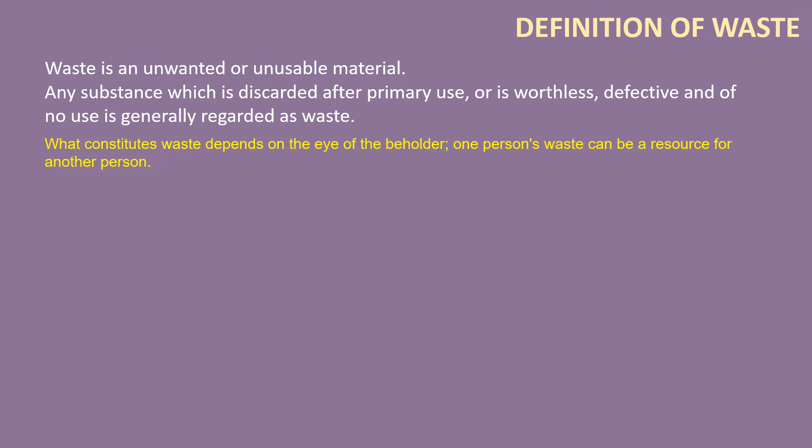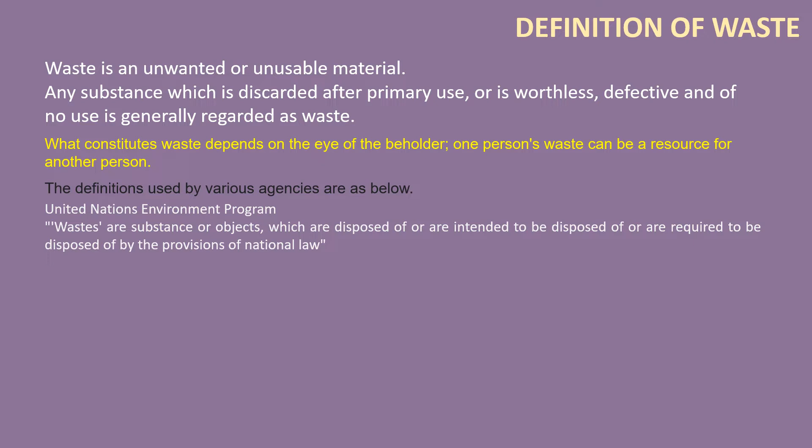There are different definitions used by different agencies. As per United Nations Environment Programme, wastes are substances or objects which are disposed of or are intended to be disposed of or are required to be disposed of by the provisions of the national law. As per United Nations Statistics Division, wastes are materials that are not prime products, for which the generator has no further use in terms of his or her own purposes of production, transformation, or consumption, and which he or she wants to dispose.

Wastes may be generated during the extraction of raw materials, the processing of raw materials into intermediate and final products, the consumption of final products, and other human activities. Residuals recycled or reused at the place of generation are excluded.

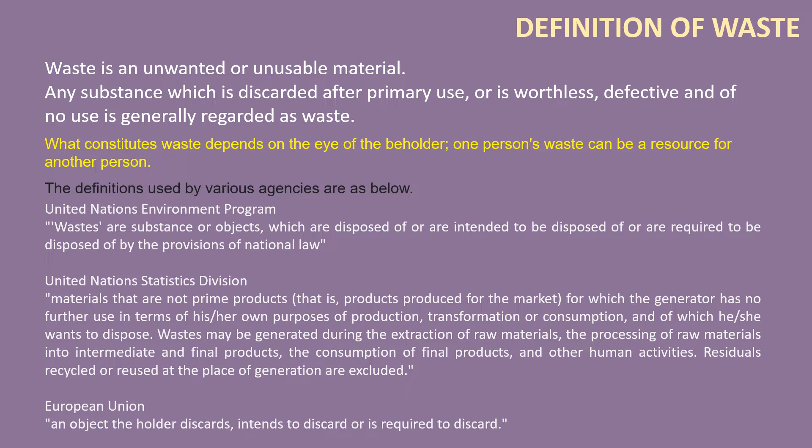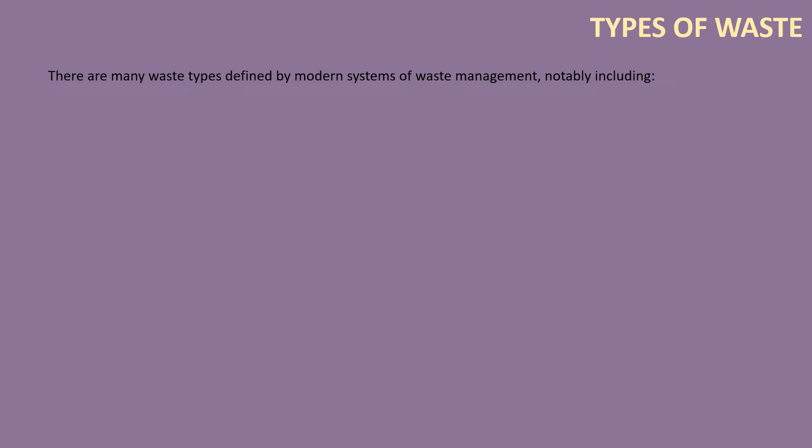As per European Union, waste is an object the holder discards, intends to discard, or is required to discard. The waste can be in solid, liquid, or gaseous form. Solid waste is categorized into 4 types: municipal waste, hazardous waste, biomedical waste, and special hazardous waste.

Municipal solid waste includes household waste, commercial waste, and demolition waste. Although the waste may originate from a number of sources that has nothing to do with the municipality, the traditional role of municipalities in collecting and managing these kinds of wastes have produced this particular term, municipal waste.

Household waste, commonly known as trash or garbage, is a waste type consisting of everyday items that are discarded by the public. It also contains food waste. The segregation of organic and inorganic waste, the dry and the wet waste at the source itself has been enforced in many countries around the world. It has also been initiated in India.

Commercial waste consists of waste from premises used mainly for the purpose of trade or business, or for the purpose of sport, recreation, education, or entertainment, but excluding household, agricultural, or industrial waste.

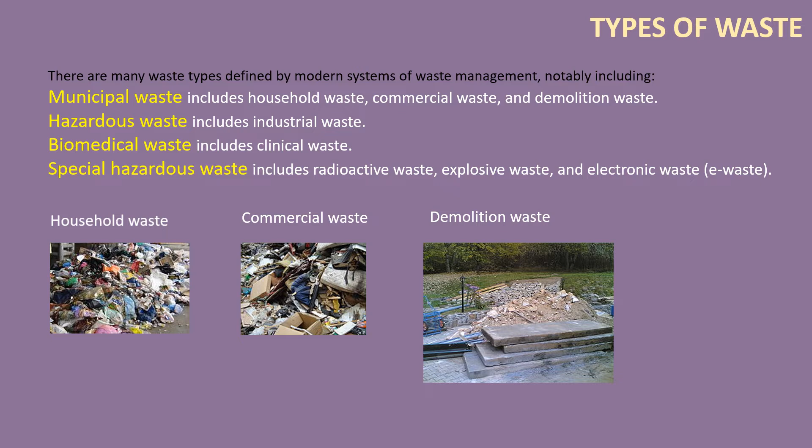Demolition waste is debris from destruction of buildings, roads, bridges, or other structures. Debris varies in composition, but the major components are concrete, wood products, brick, clay tiles, and steel. There is a potential to recycle many elements from the demolition waste.

Hazardous waste includes industrial waste. It is the waste produced by industrial activity which includes any material that is rendered useless during a manufacturing process or during mining operations. Types of industrial waste include dirt and gravel, masonry and concrete, scrap metal, oil, solvents, chemicals, scrap, even vegetable matter from restaurants.

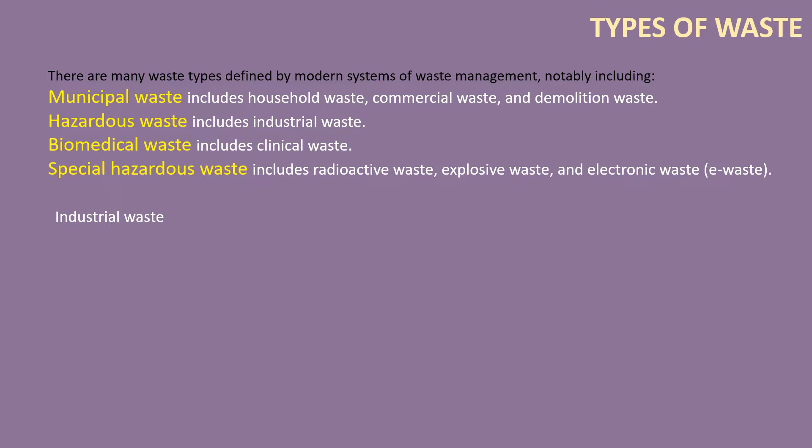Industrial waste may be solid, semi-solid, or liquid in form. It may be hazardous or non-hazardous waste. Industrial waste may pollute the nearby soil or adjacent water bodies and can contaminate groundwater, lakes, streams, rivers, or coastal waters. Industrial waste is often mixed into municipal waste, making accurate assessments difficult. Most countries have enacted legislation to deal with the problem of industrial waste, but enforcement is always an issue.

Biomedical waste or hospital waste is any kind of waste containing infectious or potentially infectious materials. Biomedical waste may be solid or liquid. Examples of infectious waste include discarded blood, sharps, unwanted microbiological cultures and stocks,

identifiable body parts, other human or animal tissues, used bandages and dressings, discarded gloves, other medical supplies that may have been in contact with blood and body fluids, and laboratory wastes that exhibit similar characteristics. Waste sharps include potentially contaminated used needles, scalpels, lancets, and other devices capable of penetrating skin.

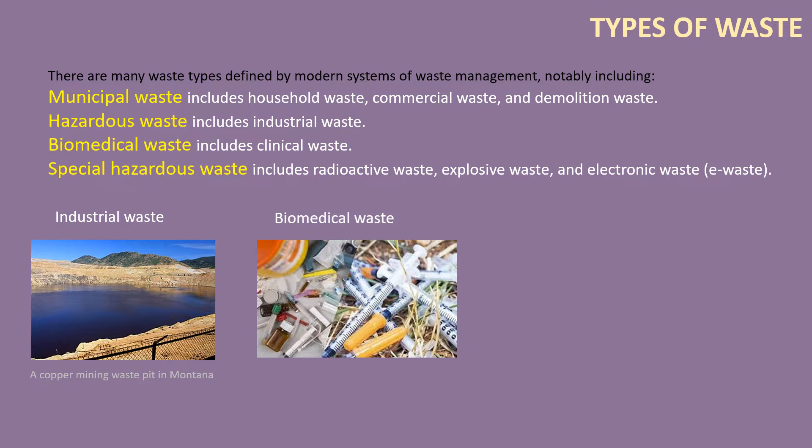Electronic waste or e-waste describes discarded electrical or electronic devices. These include refrigerators, air conditioners, small household appliances, IT equipment including monitors, consumer electronics including televisions, lamps and luminaires, toys, tools, medical devices, monitoring and control instruments, automatic dispensers, etc.

Electronic scrap components such as CPUs contain potentially harmful materials such as lead, cadmium, beryllium, or brominated flame retardants. Recycling and disposal of e-waste may involve significant risk to health of workers and their communities.

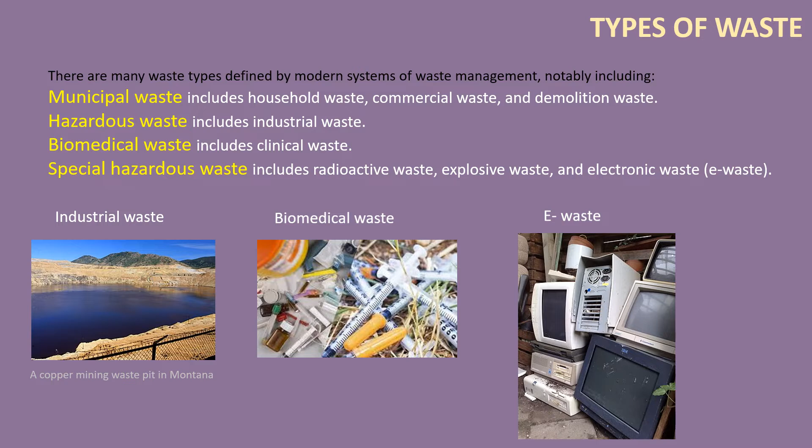Waste management includes the processes and actions required to manage waste from its inception to its final disposal. This includes the collection, transport, treatment, and disposal of waste, together with monitoring and regulation of the waste management process and waste-related laws, technologies, and economic mechanisms. The aim of waste management is to reduce the dangerous effects of such waste on the environment and human health. A big part of waste management deals with municipal solid waste, which is created by industrial, commercial, and household activity.

Talking about the Indian scenario, the cities in India have been expanding at an unmatched pace, and this is expected to continue over the coming decades. Rapid urbanization and the consequent enhancement in the lifestyle of people are causing a huge impact on the environment, especially on the microclimate of all the growing and evolving cities due to problems such as increased burden on urban landfills.

Solid waste management has become a cause for concern for many urban local bodies in India. Urbanization, industrialization, and economic growth have resulted in increased municipal solid waste generation per person.

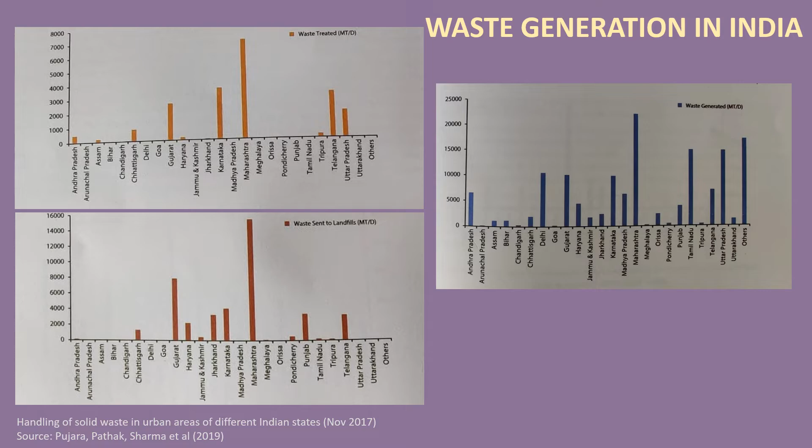Absence of proper segregation at source, generation of large quantities of solid waste, and challenges faced in the collection of waste on a regular basis make effective solid waste management a major challenge in cities with high population densities.

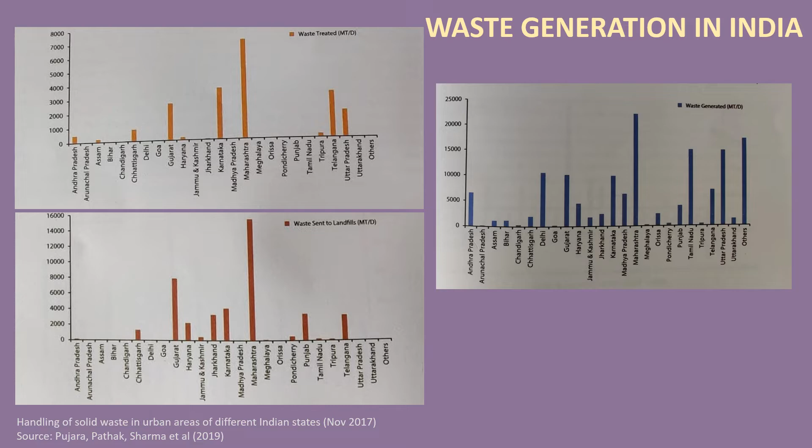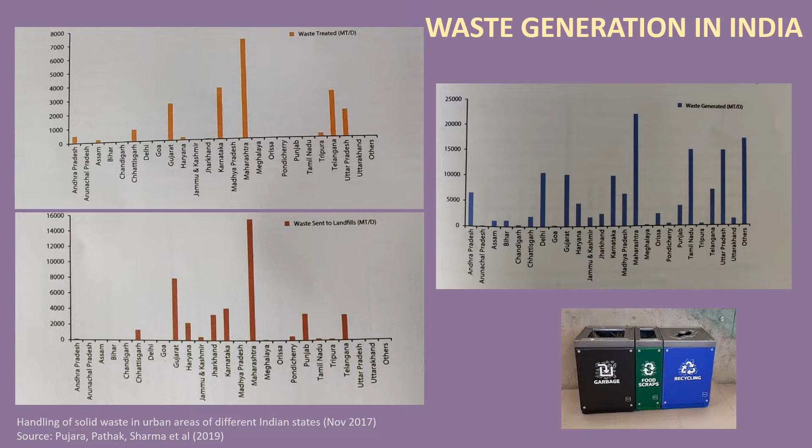For better waste management, solid waste management rules have been put in place by the central government, and several urban local bodies are also trying to reinforce waste segregation through adoption of color coding. For instance, most urban local bodies designate green bins for biodegradable waste, blue bins for recyclable waste, and black bins for other types of waste such as e-waste or hazardous waste.

Despite significant development in social, economic, and environmental areas, solid waste management systems in India have remained relatively unchanged. One of the reasons for inadequate infrastructure is the shortage of funds that have been granted to municipalities for solid waste management. Solid waste collection accounts for most of the expenditure in the whole process of managing waste. This is due to maintenance of trucks, fuel costs, salaries, etc.

In the absence of funds, there is sometimes a shortage in the staff and collection trucks required for collecting, segregating, and disposing of solid waste.

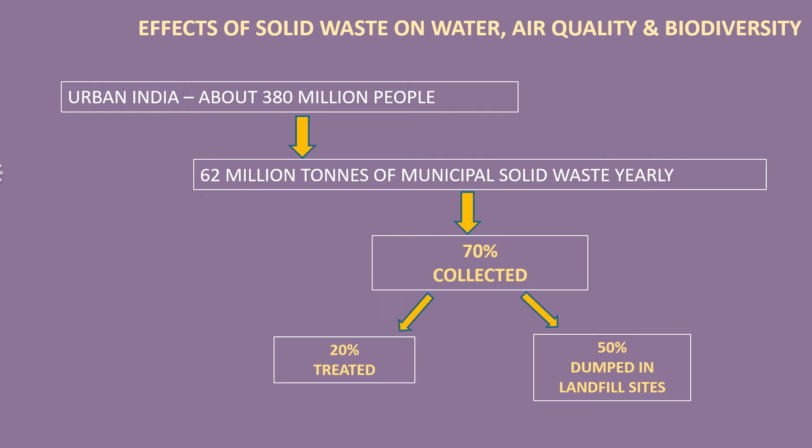Solid waste that is collected in landfills instantly becomes a part of the existing hydrological system. Rainfall percolates through the stored waste dumps and forms leachate, which is acidic in nature. This leachate moves down from these sites and flows into nearby water bodies, contaminating them.

Leachate produced from landfill sites also percolates into the soil. The effect caused on the soil can only be observed with time and might not be evident immediately after waste is dumped in the landfill. Leachate from these dump sites is generally toxic in nature and results in the degradation of the soil, thereby reducing its fertility over time and also damaging vegetation in the vicinity of the dumping site.

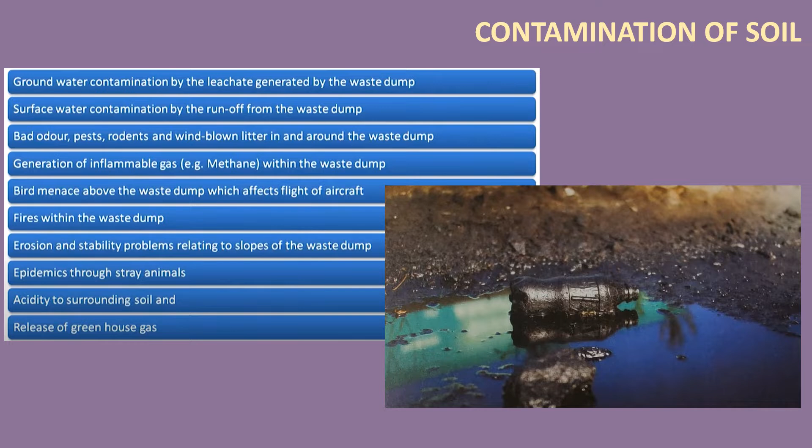The air in the vicinity of a landfill site is highly toxic and malodorous. In the landfill, a significant amount of gases consisting of methane, carbon dioxide, nitrogen, oxygen, hydrogen, and other greenhouse gases are produced that cause an increase in the temperature and changes in the climatic conditions.

Landfills are the principal source of anthropogenic methane emissions. These emissions not only cause air pollution but also contribute largely towards climate change and global warming. As landfilling increases, waste may need to be incinerated in order to make space available. This releases toxins contained within the waste into the atmosphere, contributing to air pollution as depicted in the picture.

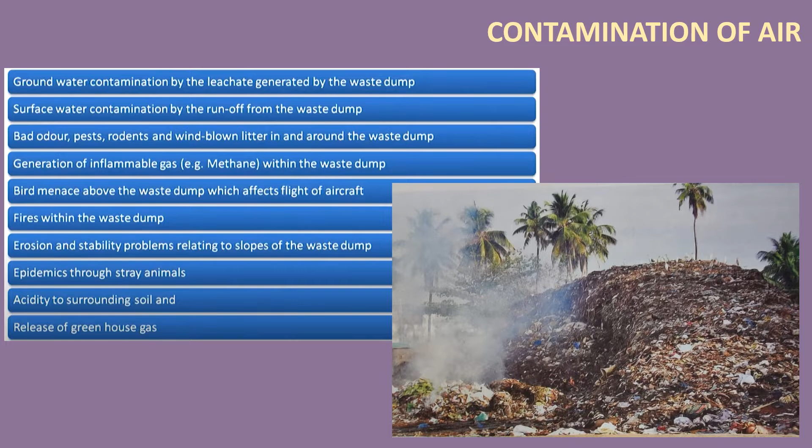The landfilling site may alter the composition of vegetation in the surrounding ecosystem. Dumping waste in landfilling site affects the flora and fauna on both land and water. It can disturb the species composition of native vegetation and allow invasion of invasive and non-native species.

Another particular waste that hugely affects biodiversity is plastic. Plastic was initially developed as a resource that had all the necessary properties required in any packaging material, that is cheap manufacturing, durability, and weather resistance. However, due to a combination of these properties, it eventually took over all other packaging products. Due to its inert nature, it can survive in the atmosphere for centuries without degrading.

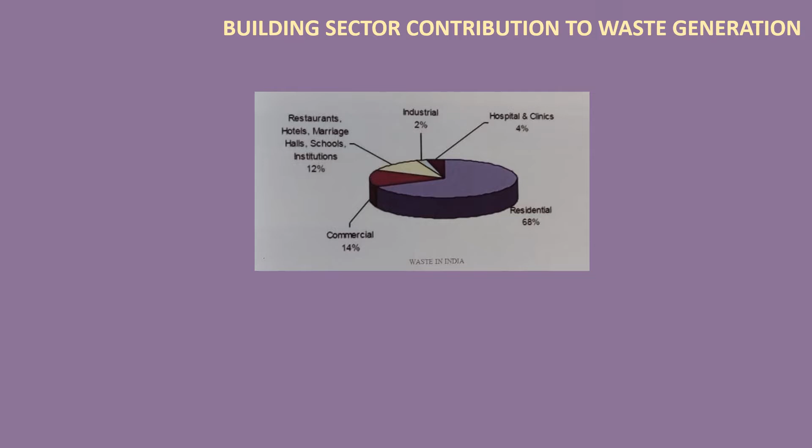The three R's, reduce, reuse, and recycle, are the three essential components of environmentally responsible consumer behavior. Various strategies that could be adopted to minimize waste generation from different building typologies are suggested here.

For healthcare facilities, the waste generation can be reduced by employing strategies such as: 1. Installation of dispensing units in housekeeping rooms to ensure that staff restricts themselves to using only the required quantity of chemicals. 2. Engaging in use of physical rather than chemical cleaning methods such as steam disinfection instead of chemical disinfection.

3. Provision of biodegradable foodware or reusable foodware like steel in canteens at healthcare facilities. 4. Use of air dryers instead of paper towels in restrooms.

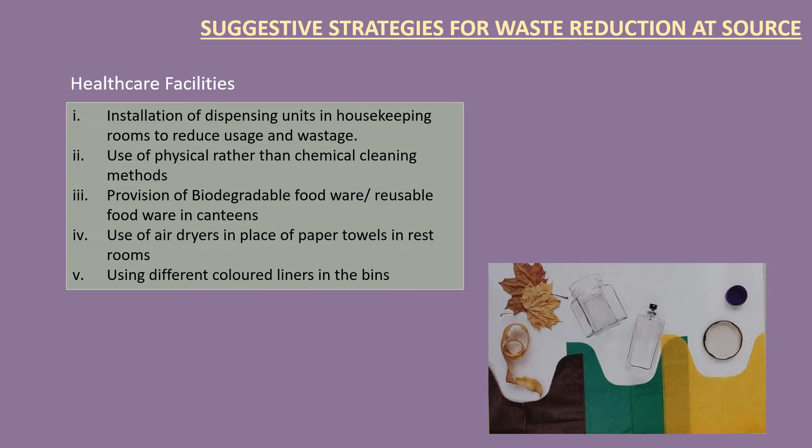5. Using different colored liners allows the cleaning crew to easily keep track of what is recyclable and which container it should be placed in. 6. Installing reverse vending machines which do not dispense something on inserting money but take in plastic bottles and dole out some sort of goodies or incentives for the user.

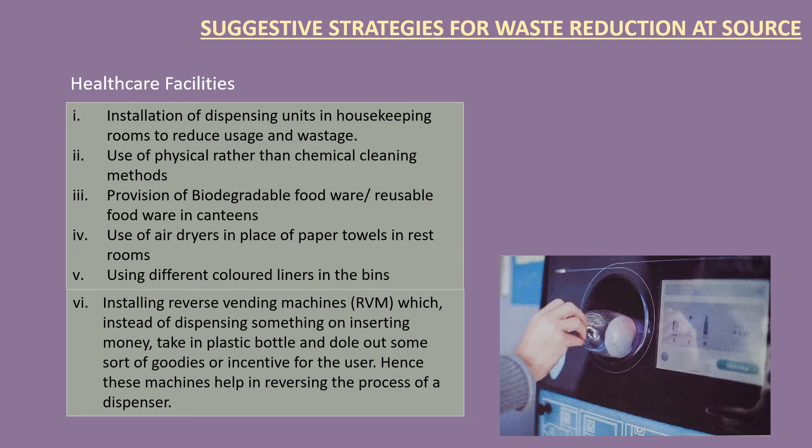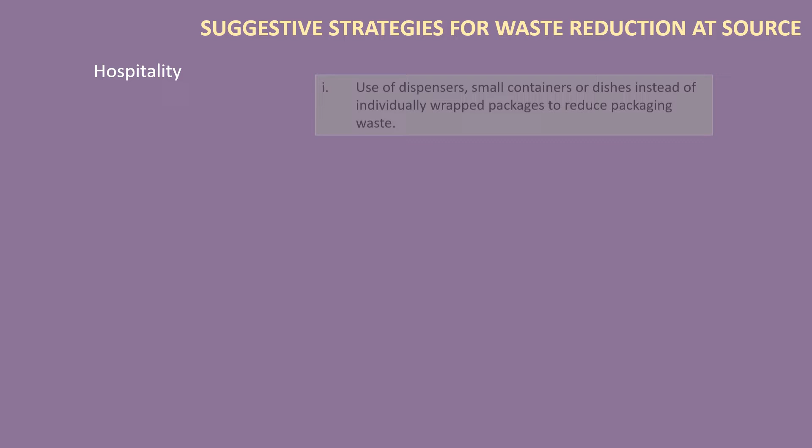For buildings under the hospitality category, the suggestive strategies are use of dispensers, small containers or dishes for sauces, sugar, butter and other condiments instead of individually wrapped packages to reduce packaging waste.

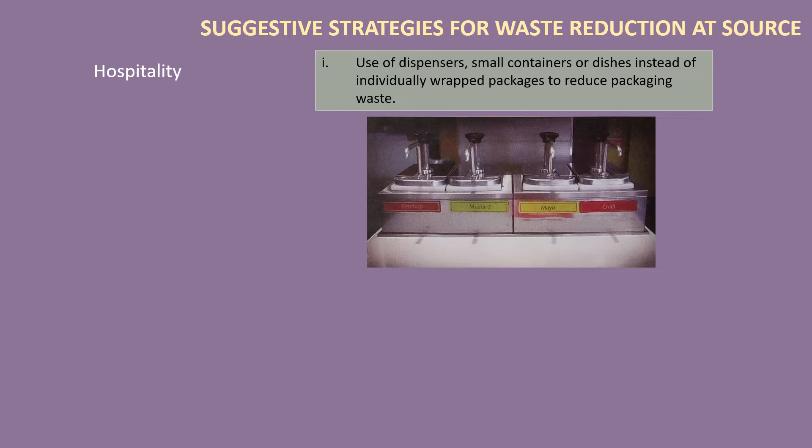Use of cloth mats and permanent coasters instead of paper mats and paper napkins that need to be discarded after every meal. Provision of water bottles that can be refilled instead of plastic disposable water bottles.

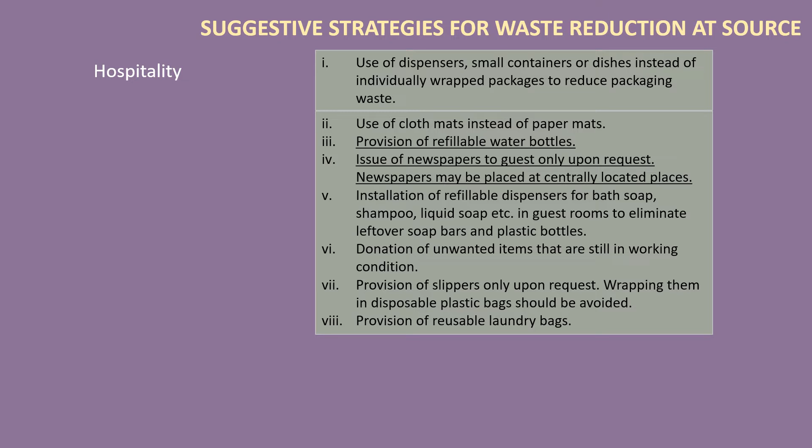Issue of newspapers to guests only upon request to reduce the volume of discarded newspapers. Newspapers may be offered at centrally located spaces such as lobbies, restaurants and news stands.

Installation of refillable dispensers for bath soap, shampoo, hair conditioner, etc. to eliminate leftover soap bars and plastic bottles of used toiletries.

Donation of unwanted items that are still in working condition such as linen, blankets, old curtains, porcelain and glassware to charitable organizations or the sale of such items to staff for reuse.

Provision of slippers only upon request. If the hotel's policy is to provide slippers in all guest rooms, then wrapping them in disposable plastic bags should be avoided.

Provision of reusable laundry bags for guests instead of single-use plastic bags. Laundered clothes may be returned in reusable garment bags instead of single-use plastic bags.

Using different colored liners allows the cleaning crew to easily keep track of what is recyclable and which container it should be placed in.

Encouraging frequent ordering of relatively small quantities instead of large quantities at one time. Installing reverse vending machines which do not dispense something on inserting money but take in plastic bottles and dole out some sort of goodies or incentives for the user.

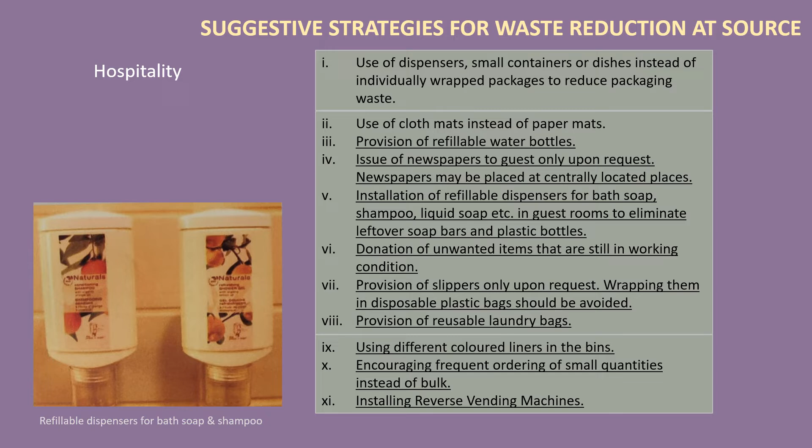Strategies for waste reduction at source suggested by GRIHA for office buildings are: printers may be equipped with access card control to ensure that only requested print jobs are executed in order to reduce accidental printing and resource wastage. Usage of refillable stationery such as pens, highlighters, correction tapes, and whiteboard markers should be promoted.

Replacement of paper towel dispensers with modern cloth towel dispensers which disinfect the cloth after every usage.

Refilling and recycling of empty cartridges. Use of biodegradable stationery such as pens made of corn starch.

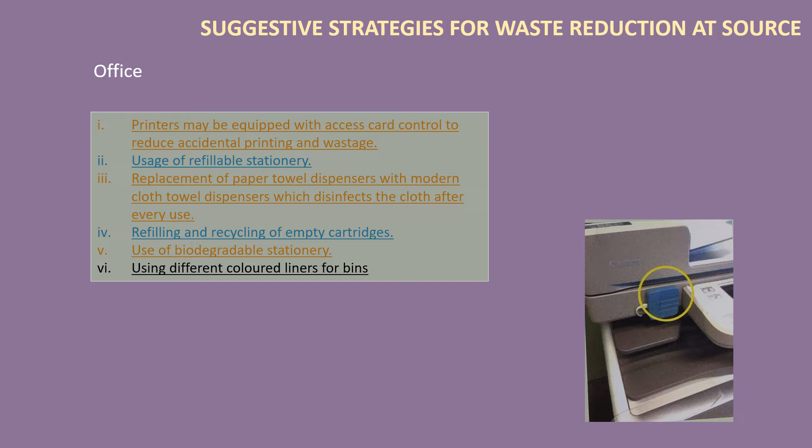The choice of colored liners within bins may be impactful. Using different colored liners allows the cleaning crew to easily keep track of what is recyclable and which central collection container it should be placed in.

For residential buildings, the strategies for waste reduction are education of residents through outreach programs that explain techniques, costs, benefits, and examples of source reduction, which can include presentations, workshops, videos, etc.

Reduction in the quantity of newspapers and junk advertisement material by switching over to digital media. Returning hangers to local dry cleaners in the building area for reuse.

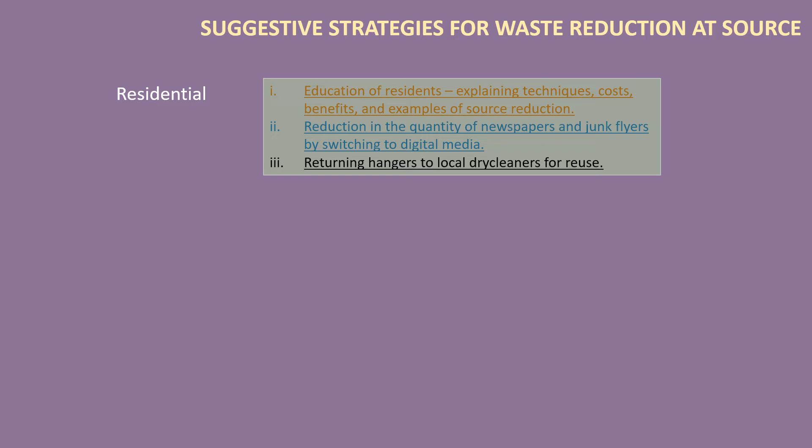Buildings for retail can use strategies like reuse of fixtures, furniture, carpeting, and construction material obtained from the remodeling of stores. These materials can either be reused within the premises itself, or sold to recyclers, or donated to an NGO working with recycled materials.

Using different colored liners to segregate the recyclable material. Stores can use shredded waste paper as packing material.

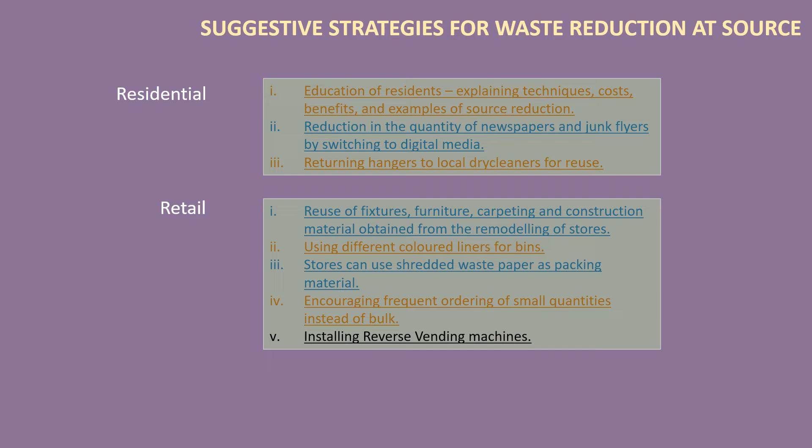Encouraging frequent ordering of relatively small quantities instead of large quantities at one time. Installing reverse vending machines. The strategies for waste reduction at source given by GRIHA for transit terminals are: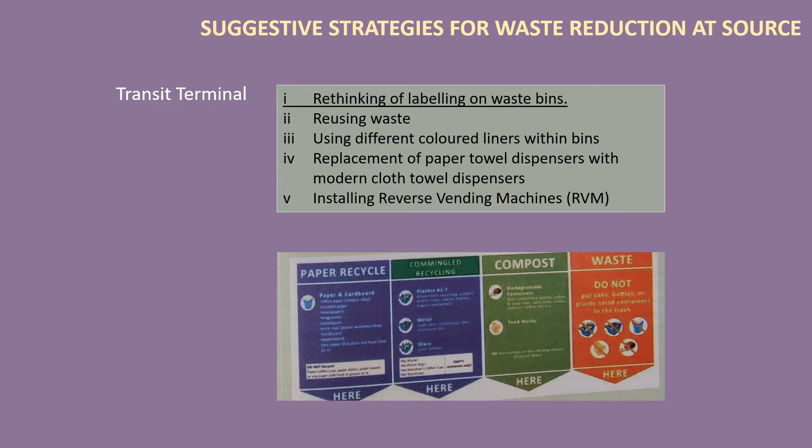Some airline lounges already have locations where discarded newspapers and magazines may be used by other passengers. This form of reuse should be encouraged.

The choice of colored liners within bins may be impactful. Using different colored liners allows the cleaning crew to keep track of what is recyclable and which central collection container it should be placed in.

Food vendors at the airport can use biodegradable foodware instead of disposable plastic materials. Replacement of paper towel dispensers with modern cloth towel dispensers.

Installing reverse vending machines, which do not dispense something on inserting money but take in plastic bottles and dole out some sort of goodies or incentives for the user.

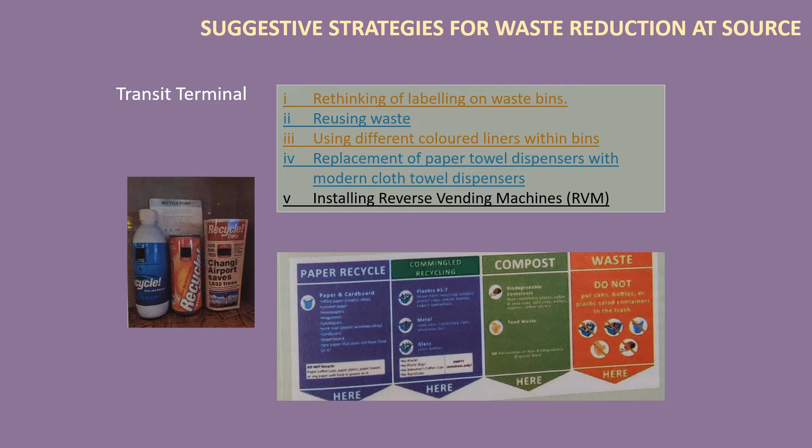Beginning from the construction stage to the demolition stage, a building generates different types of wastes throughout its life cycle. These wastes are broadly classified into organic and inorganic wastes.

The organic waste or wet waste is biodegradable in nature. This fraction of waste, once segregated from the inert fraction of solid waste, can be easily utilized as a resource with several applications.

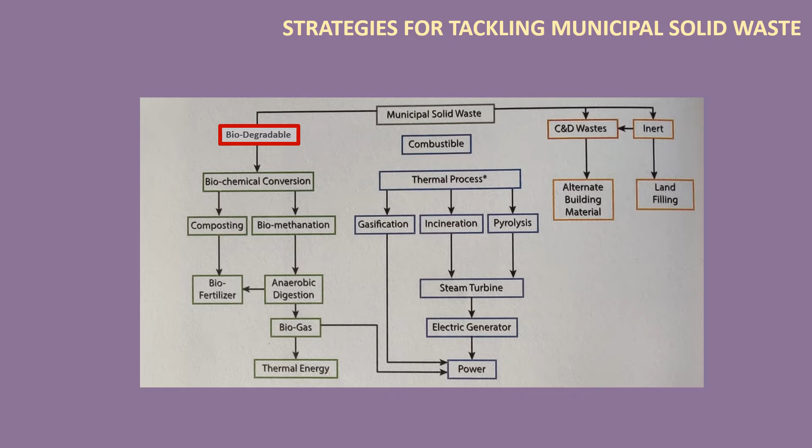In a developing country like India, a large fraction of the total solid waste generated is organic in nature. According to National Building Code, about 40% of the total municipal solid waste is organic. Organic waste not only consists of food and kitchen waste, but also has a huge fraction of landscape waste.

Organic waste does not contain any recyclable material and is of no value to rag pickers and recyclers. Thus, if it is not treated before disposing from site, it gets dumped into a landfill. Hence, this organic waste should be segregated and subsequently treated and converted into a resource at the earliest stage to derive maximum potential.

Pit composting is one of the methods of converting organic waste into a resource. It refers to biological decomposition of organic waste by bacteria, fungi, worms, and other microorganisms in controlled aerobic conditions to produce compost.

The compost produced from this process is a natural soil conditioner that is rich in nutrients and may be used to enhance the fertility of the soil and boost the growth of vegetation in the soil.

The common composting techniques are vermicomposting and mechanical composting. Vermicomposting uses various worms to create a mixture of food waste, bedding materials, and vermicast. Vermicast is the end product after breakdown of organic matter by the worms.

The vermi manure thus produced has fewer contaminants and therefore reduces toxic emissions into the atmosphere. It is enriched with nutrients and is a valuable fertilizer for soil.

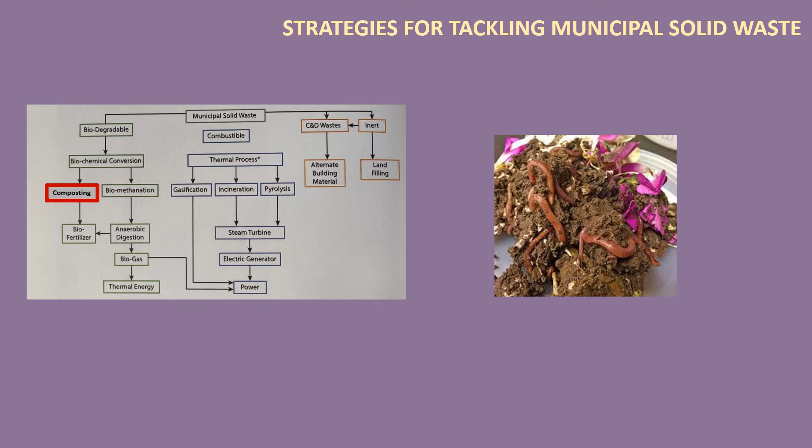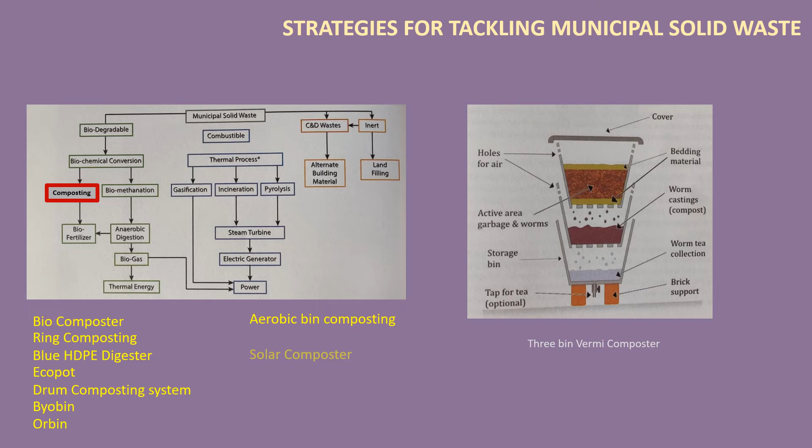Biomethanation involves the digestion of organic material by microorganisms under anaerobic conditions into biogas. Biogas is a combustible gas rich in methane and can be used for cooking or generating electricity. In addition to biogas, the process generates compost that can be used as soil fertilizer.

Biogas is a renewable source of energy that utilizes organic waste that would otherwise have been sent to a landfill. Installing a biogas plant is also a cost-effective strategy. Some of the biodigesters available in the Indian market are TEAM, ARTI, and Nisargruna.

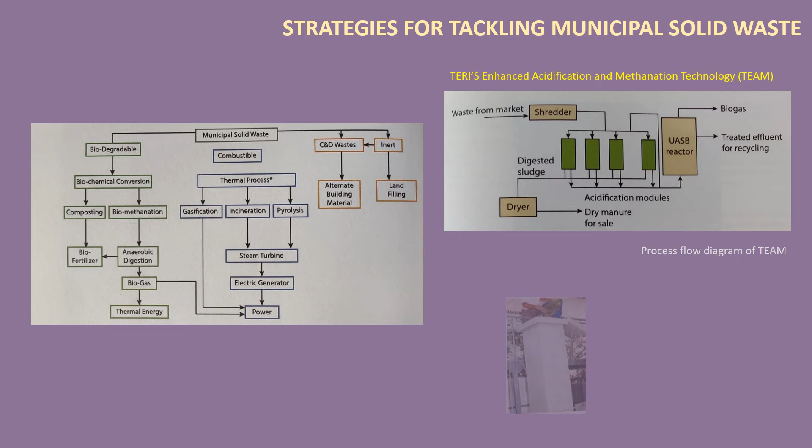This diagram shows the process flow of TERI's enhanced acidification and methanation technology. The Compact Biogas System by the Appropriate Rural Technology Institute, commonly known as ARTI, uses starchy agro waste, non-edible seeds, or leftover food.

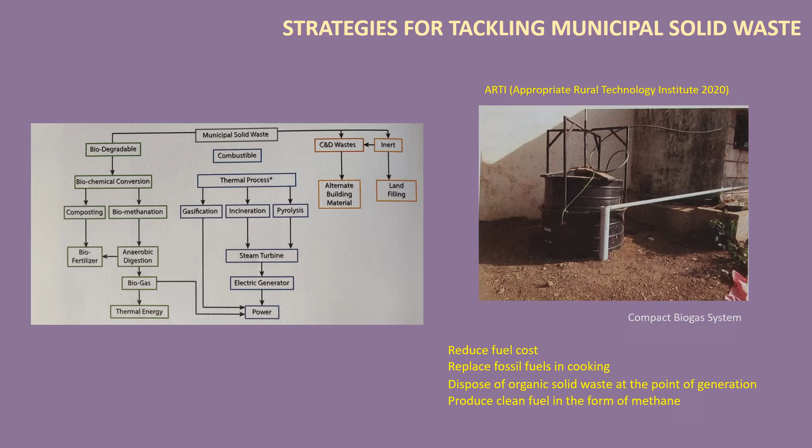The main objectives of this technology are to reduce fuel cost, replace fossil fuels in cooking, dispose of organic solid waste at the point of generation, produce clean fuel in the form of methane, reduce BOD and COD values of the waste, and reduce the cost of organic solid waste disposal.

Nisargruna Biogas Plant, built by Bhabha Atomic Research Center, can process biodegradable waste such as kitchen waste, grass, dry leaves, paper, and dung. It offers zero garbage and zero effluent and provides methane gas along with high quality manure.

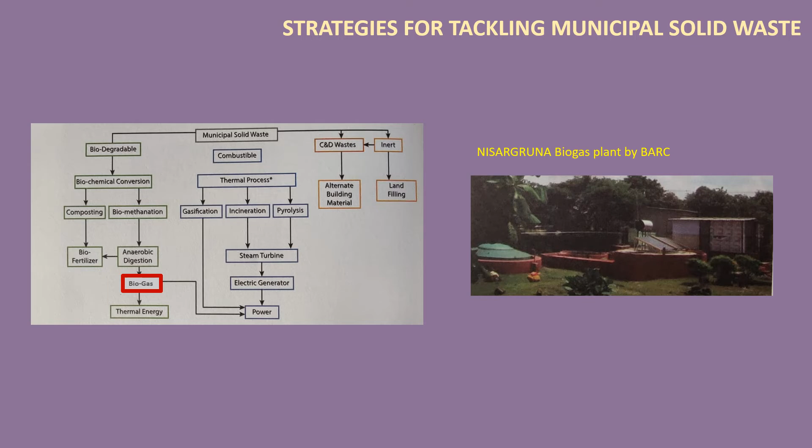Next is the inorganic waste. Once the biodegradable fraction of solid waste has been segregated and treated, the inert fraction of waste has to be treated separately. The methods of handling inorganic solid waste involve extracting and separating all recyclable fractions in order to minimize the quantum of solid waste so that further treatment becomes easier. Once all resources have been derived from solid waste, the rest of it is converted into energy.

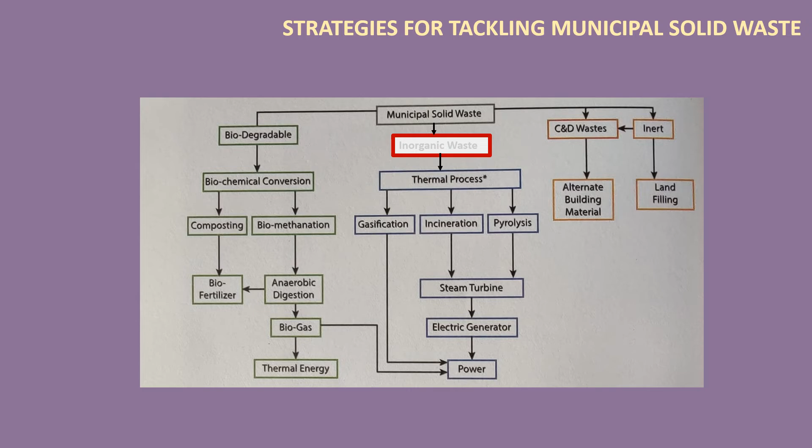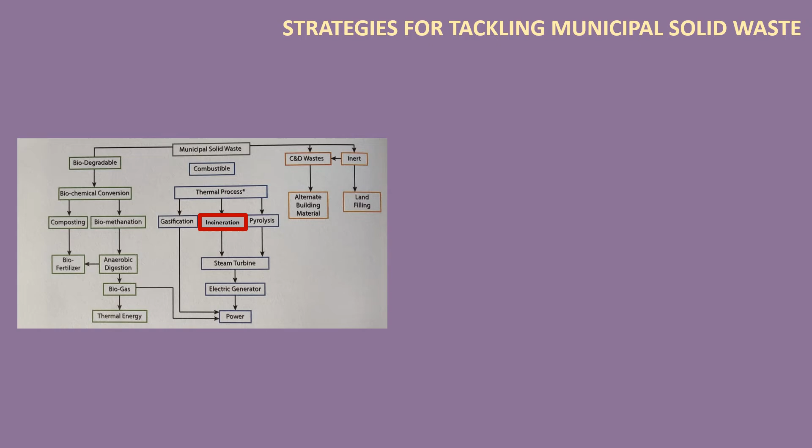The commonly known technologies for converting waste to energy are incineration, gasification, and pyrolysis. Combustion or incineration is the oldest and most common way of treating solid waste. It merely involves combustion of waste in large furnaces in order to produce heat that turns water into steam, which moves the turbine, thereby producing electricity.

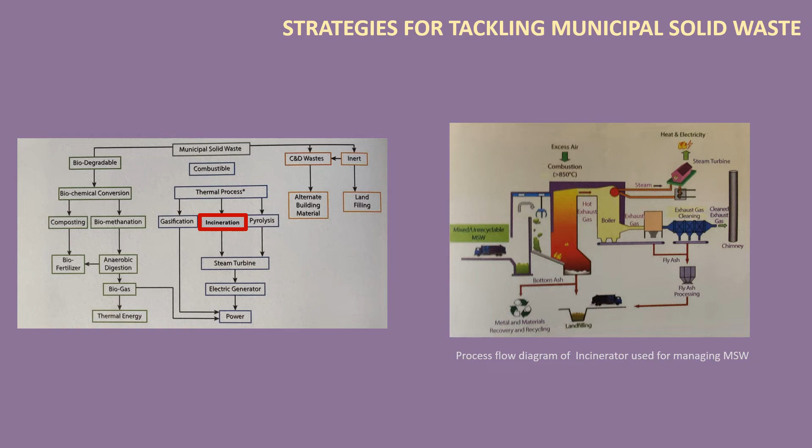Gasification is done in a limited supply of oxygen. Steam or oxygen in the air reacts at high temperature with the available carbon in the waste material to produce gases such as carbon monoxide, hydrogen, and methane. The gasification process produces syngas that is used to turn a turbine, which in turn generates electricity.

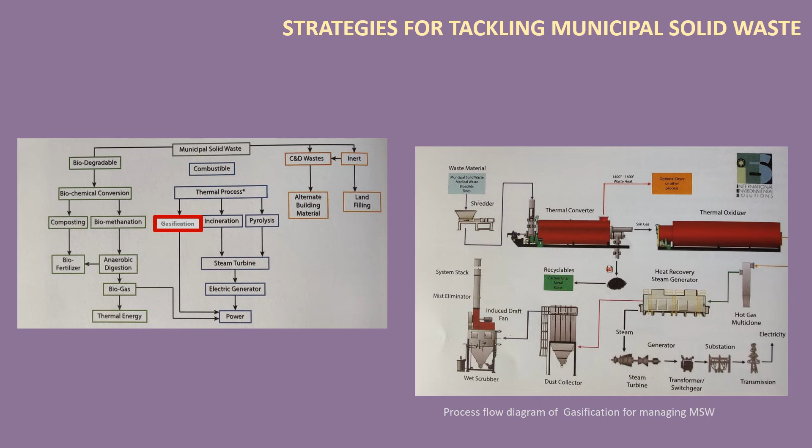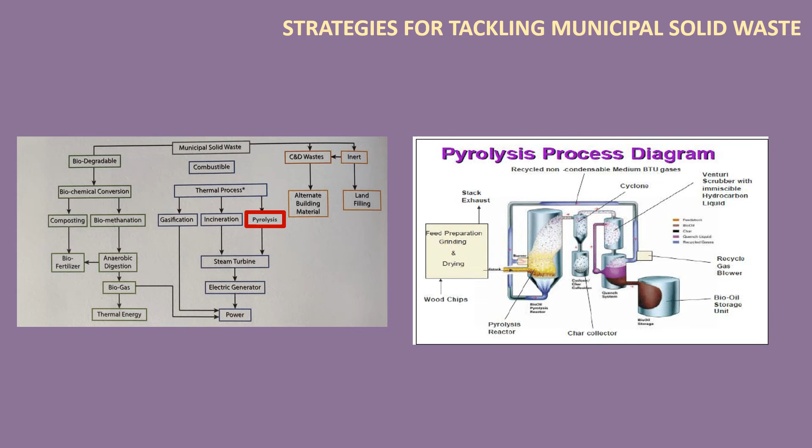Pyrolysis is also a thermal process similar to gasification. It works in the absence of oxygen and uses heat to break down organic materials. Materials such as coal, animal and human waste, food scraps, paper, cardboard, plastics, and rubber are suitable for pyrolysis processing. This process produces oil which can be used as synthetic biodiesel or refined to produce other useful products. Another common byproduct of pyrolysis is charcoal.

The next category of waste is construction and demolition waste. Construction waste poses a great danger to the environment. For this reason, construction industries need to find suitable methods to manage construction and demolition materials that generate waste during construction activities. Using trash chutes to get waste out of the site is one good way of safe waste disposal.

Construction and demolition materials consist of debris that is generated during construction, renovation, and demolition of buildings, roads, and bridges. Some of the heavy and bulky materials used in construction are concrete, wood, asphalt, metals, bricks, glass, and rocks.

Benefits of reducing disposal of construction and demolition waste materials are many. It will create employment and increase economic activity in recycling industries. This will also increase business opportunities within local communities in areas where deconstruction and selective demolition are used. There will be overall reduction in building project expenses through avoided purchase costs and donation of recovered materials to qualified charities, which offer a tax benefit.

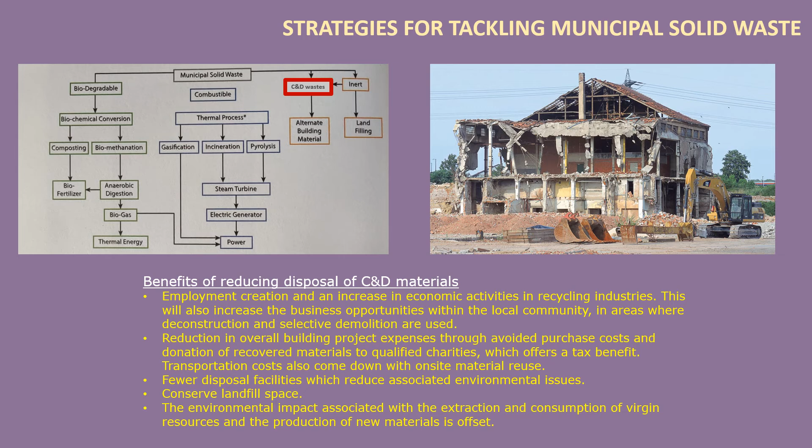The waste management practices for C&D wastes are reduce, divert and reuse, and recycle. With source reduction, one can reduce the life cycle of material use, energy use, and waste generation. Source reduction prevents waste from being generated in the first place.

Some examples of this include preserving existing buildings rather than constructing new ones, optimizing the size of new buildings, designing new buildings for adaptability to prolong their life, using construction methods that allow disassembly and facilitate reuse of materials, and employing alternative framing techniques.

Reducing construction and demolition debris also conserves landfill spaces, reduces the environmental impact of producing new materials, and can cut down overall building project expenses through avoided purchase.

Raw construction and demolition debris can be diverted and used as a resource. Some materials that can be diverted include landscape and land clearing debris, asphalt pavements, gravel and aggregate products, concrete, masonry scrap and rubble, clean wood, plastics, and insulation materials.

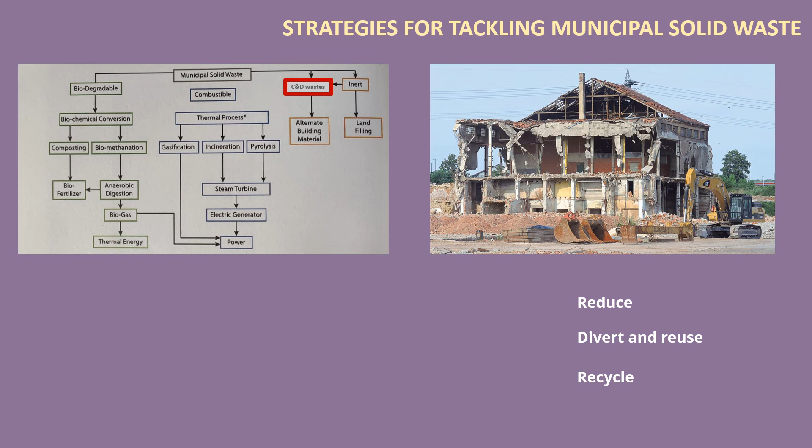Recovering used but valuable construction and demolition materials for further use is an effective way to save money and conserve natural resources. Deconstruction can be used at a number of levels to salvage usable materials and significantly cut the waste. A number of building components and construction debris can be recycled.

Concrete and rubble are often recycled into aggregate and concrete products. Wood can be recycled into engineered wood products like furniture. Metals like steel, copper, and brass are also valuable resources to recycle.

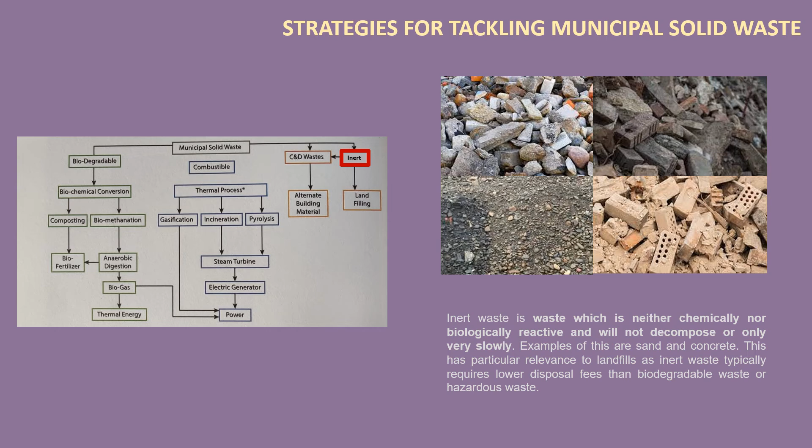Inert waste is waste which is neither chemically nor biologically reactive and will not decompose or only very slowly decompose. Examples of this are sand and concrete. This has particular relevance to landfills as inert waste typically requires lower disposal fees than biodegradable waste or hazardous waste.

The steps of solid waste management are waste collection, segregation, transportation, processing, and disposal.

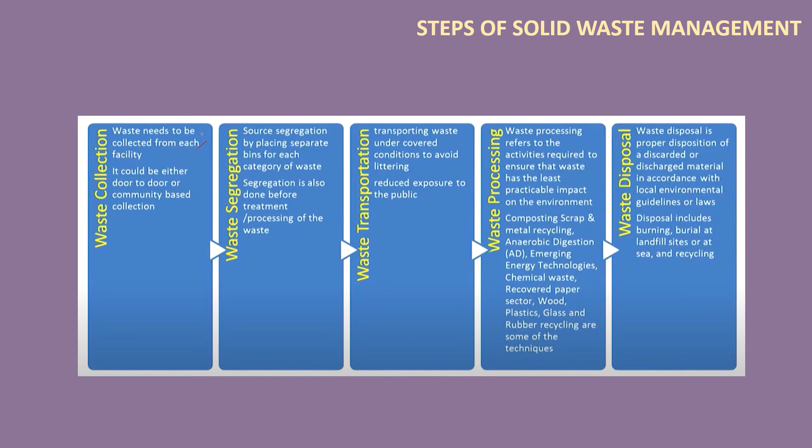Now let me deliberate on the challenges faced in solid waste management in buildings. Segregation of waste is the primary step in the process of waste management and is extremely crucial. This could help in either smoothing the process of waste management or making the process cumbersome.

The biggest challenge India faces in terms of solid waste management is the lack of awareness amongst building occupants and visitors about the impact caused by unsegregated waste.

Creating awareness amongst the building occupants can be done by stressing on the fact that putting different waste materials in separate bins not only reduces the overall cost of managing solid waste, but also ensures that maximum resources are derived from the waste stream, which otherwise would have been disposed of in a landfill.

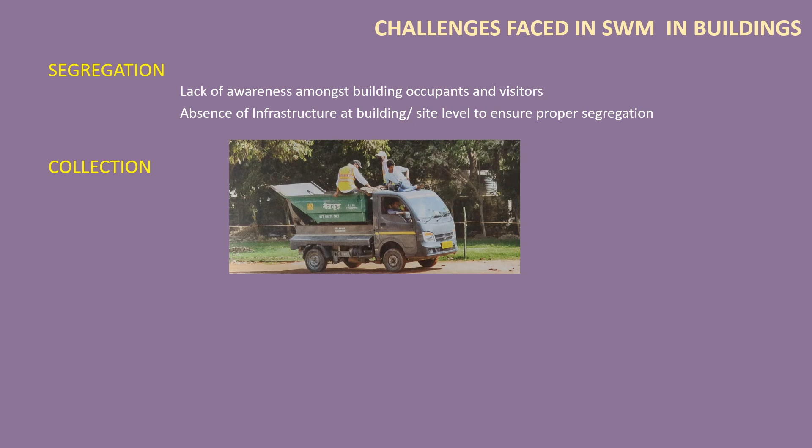Municipalities across India are in the process of improving the collection mechanism. This figure depicts a municipality garbage truck collecting wet waste at community level.

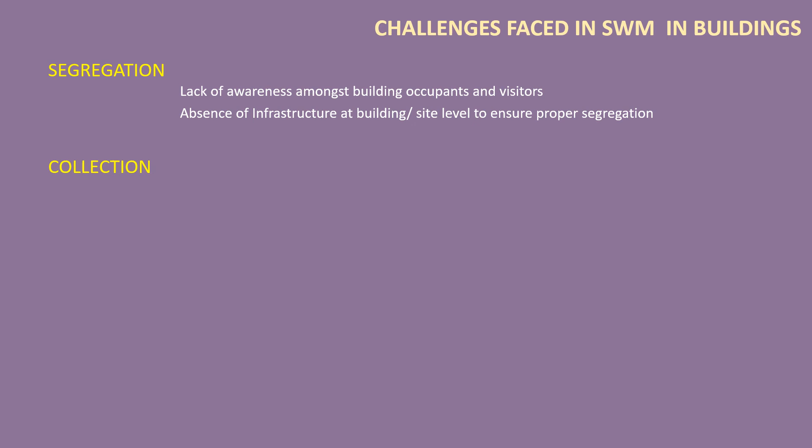This mixed waste, which has been collected by the municipalities, is sorted on a daily basis at all collection centers. However, the purpose of segregation at source is defeated in this case.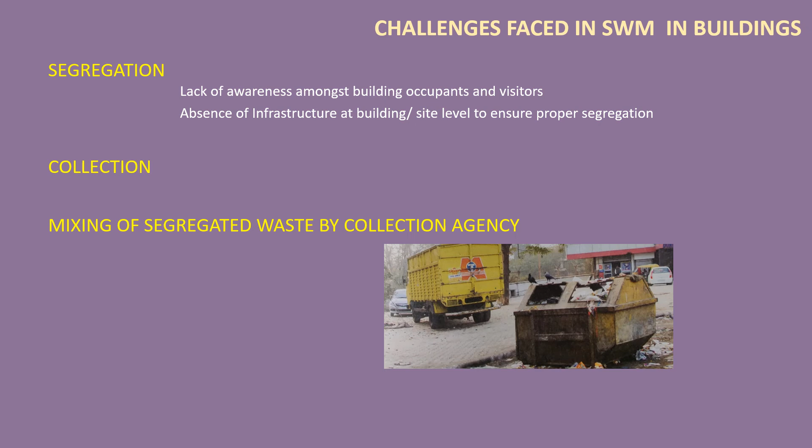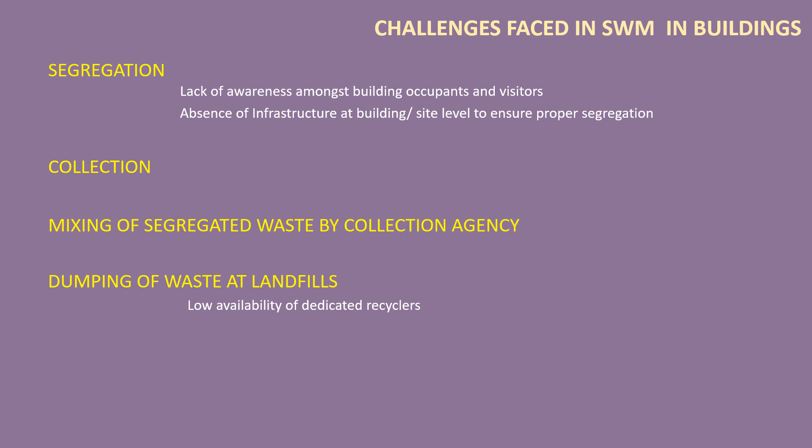There is an urgent need to move to more sustainable waste management, which would require new management systems and waste management facilities to be incorporated across the country.

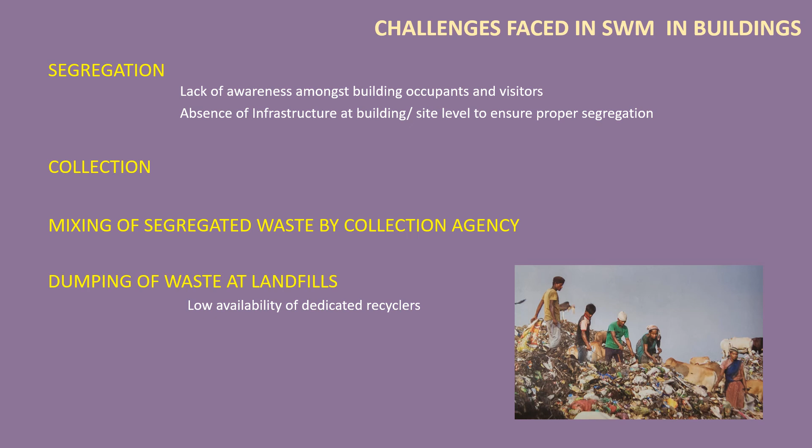Several waste management rules and regulations have been drafted and released. However, there has been a slack in their on-ground implementation.

There is a need to create a dedicated group of officers and skilled staff at the local level for a robust implementation. Adequate training, capacity building and hands-on experiments would enable them to identify bottlenecks and take appropriate action.

Also, sustainable, effective waste management could only be achieved through proper implementation of the rules, industry incentives, and public awareness.

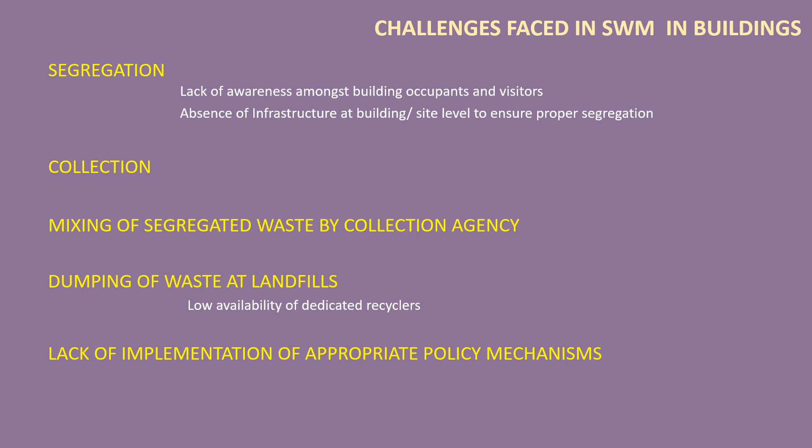With the aim to address the need for waste minimization along with proper segregation, collection, and management, certain sustainable development goals have been rolled out by the United Nations to enhance resource efficiency. SDG 12 refers to responsible consumption and production.

Goal number 12.3 intends to reduce the per capita global food waste to 50% at the consumer and retail levels, and diminish food losses along production and supply chains, including post-harvest losses. This could be achieved by bringing behavioral change in consumers as well as retail owners to reduce impact on the environment.

Goal number 12.4 intends to achieve environmentally sound management of chemicals and wastes throughout their life cycle, in accordance with international frameworks, and significantly reduce their release to air, soil, and water in order to minimize adverse effects on human health and on the environment by 2020.

The waste management rules have been developed in India to cater to this particular goal of the SDGs and help India address its problem of waste disposal and management.

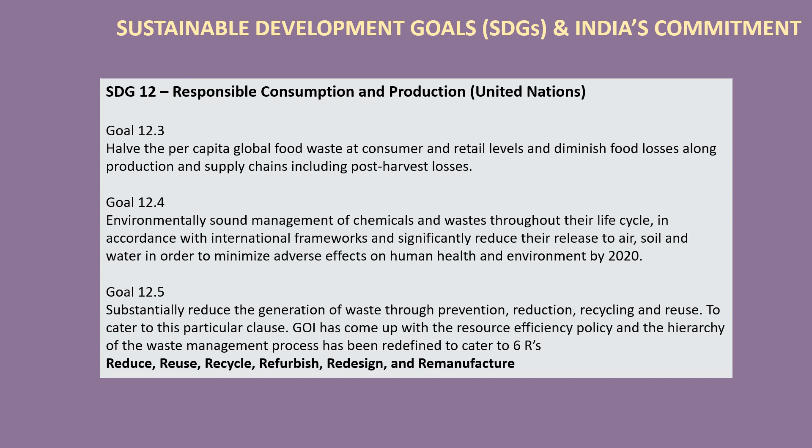Over the last decade, the Government of India has been proactively emphasizing the importance of appropriate solid waste management across the country. The government has been launching new programs and policies to promote efficient waste management and push for better sanitation and cleanliness around India.

Some of the programs launched by the Government of India are Swachh Bharat Abhiyan, Swachh Sarvekshan Survey, and Swachhata app.

Resource efficiency policy launched by Government of India demands 100% recycling and reuse rate of PET plastic by 2025, and 75% recycling and reuse rate of other plastic packaging materials by 2030.

It also suggested a ban on disposal of recyclable waste to landfills by 2022. The recyclable waste includes plastics, metals, glass, paper, cardboard, and biodegradable waste.

The action plan also called for a 50% recycling rate for construction and demolition waste by 2025 and 75% by 2030.

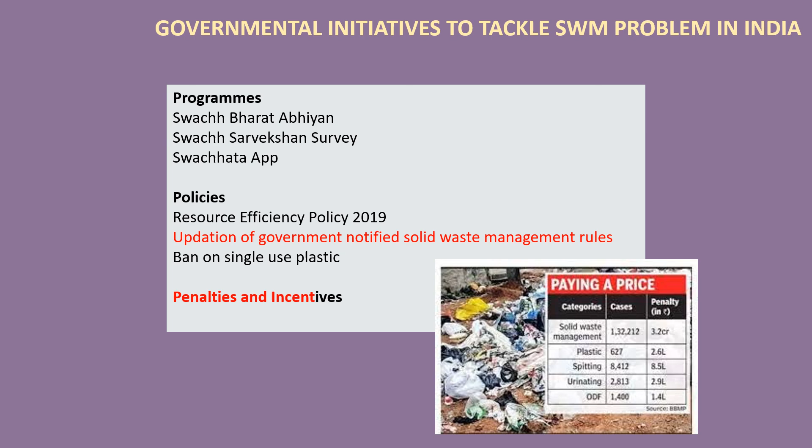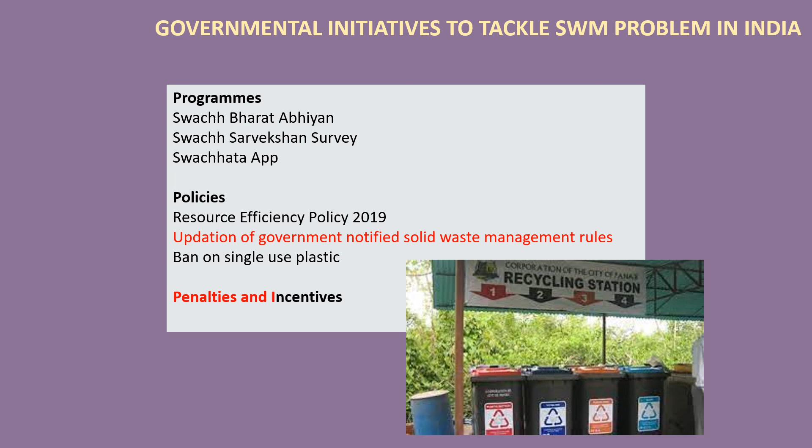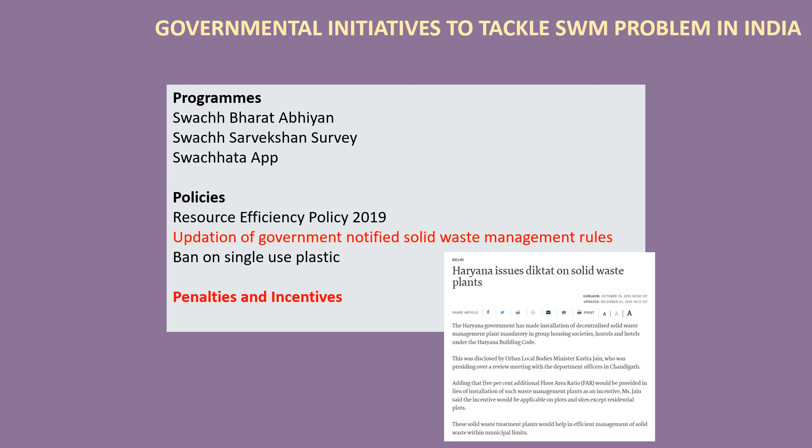Government of Haryana gives incentive in the form of additional FAR of 5% for all building users who install solid waste management plant for treatment of total generated waste.

These are some case studies of projects who have targeted net zero waste.

Dalmia Vidya Mandir, Rajgangpur, Odisha was the pioneer project in GRIHA, and it has been planned exceptionally well. Located in the township developed by Dalmia Group, this project has devised measures to handle all the waste that is generated within the campus.

All the paper waste generated within the school premises is being used for paper mache in the school's art room, while all other waste is being sent to the incinerator located within the campus, which generates energy to power the cement generation plant.

In Pune, the Zero Waste project at Katraj was undertaken in association with an NGO. The corporation banned open dumping in June 2010, and all disposals are done using scientific processing only.

There are 5 decentralized waste processing plants across the city. PMC has activated a new mobile SMS alert system for timely and effective complaint redressal regarding garbage containers. This type of model is a first in India that received ISO certification for solid waste collection and transportation.

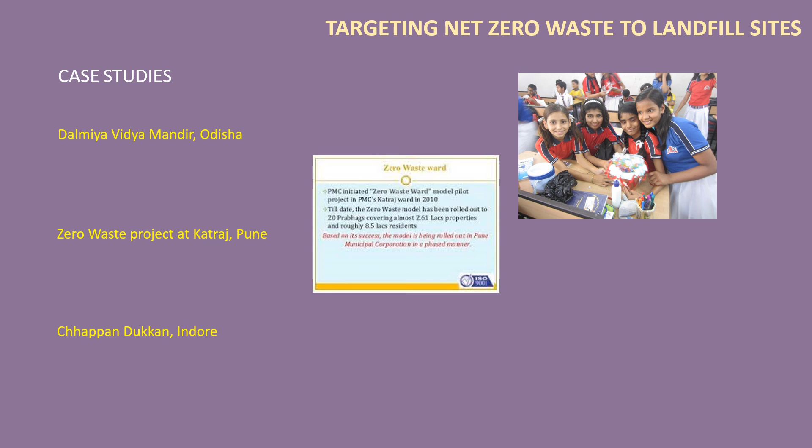Chhappan Dukkan at Indore is an organic waste collection center that is located inside a lane that is lined with small eateries.

The market produces on an average 1.5 tons of food waste daily. This waste is composted and sent to other centers for further processing.

Indore has also set up a facility to process waste from vegetables, fruits and flour. This waste is converted into biogas, and the gas produced is used to run city buses and sold as cooking fuel to hotels and the Indian Institute of Management at a subsidized rate.